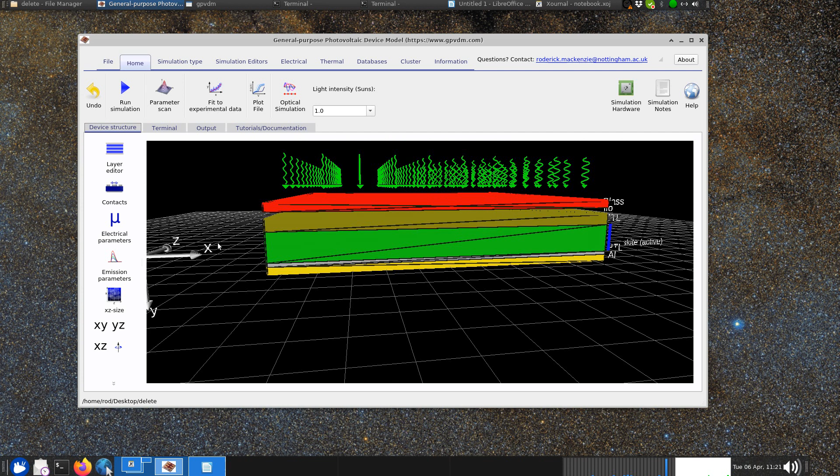So here's the simulation the person sent in. So here's the device structure. Firstly, let's just have a look at the structure. You've got some glass, some ITO, and you've got one active layer there. And let's just run a little simulation, see what results it produces. So there we go. Let's look at the JV curve. Let's just zoom in and see what we're getting here.

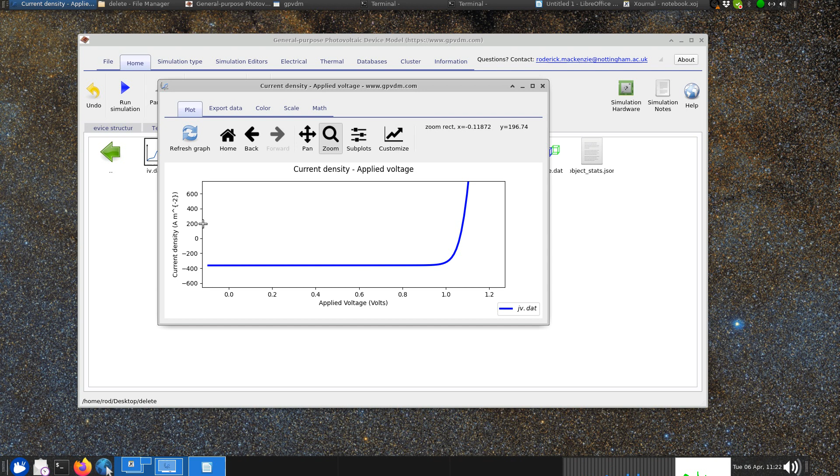So quite a lot of short circuit current, about 400 amps per meter squared. Very high JSC. So this is why you're getting very high efficiencies, because you've got a load of current being produced and you've got a very, very high VOC, which will make the efficiency very high. So let's just look at those numbers in detail.

So let's look at SimInfo, and we've got fill factor of 0.87, power conversion efficiency of 33%, which is crazy high. VOC very high, JSC very, very high. So the question is, why is this happening? Well, let's look at a bit of theory to try and understand why this is happening.

So let's just draw a solar cell. Here's one contact, and here's another contact. And let's draw some light coming in. We'll call these photons. And these will generate an electron and a hole pair. Now, this electron will move to the contacts, and this hole will move to the contacts. And they'll move to the contacts at a speed dictated by the mobility, which is mu. So mu for the electrons and mu for the holes. And this is called the charge carrier mobility.

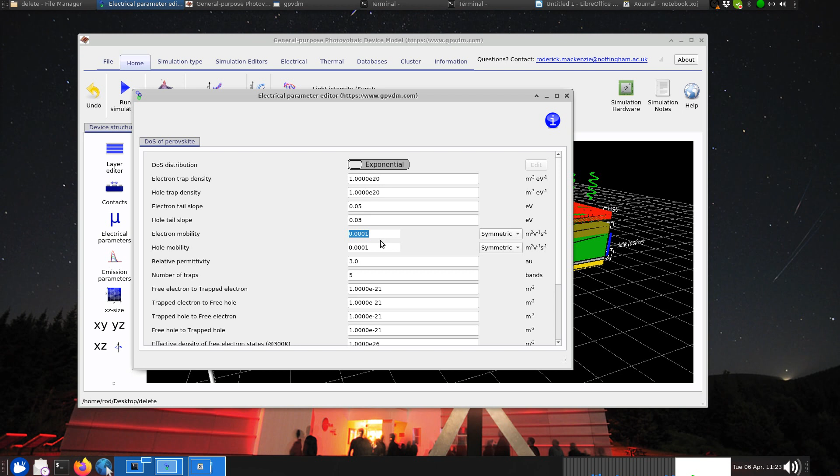And if you look at the model where this is, it's here in the electrical parameter tab. So it's got electron mobility, and it's whatever this has been set to here. So you can imagine that if the mobility is very, very high, then the rate at which the electrons and holes are going to move to contacts is going to be very quick. If the mobility is very small, the rate at which the carriers move to contacts is going to be slow.

Now, on their way to the contacts, this electron could meet another hole. So the electron moves along here, and all of a sudden it's met another hole. And what we can get here is a recombination event, when the electron recombines with a hole. Now, if the probability of this event is basically 0, so if the recombination doesn't happen, then 100%. So if we have 100 photons coming in here, we'll get 100 electrons out of there, and the same we'll get 100 holes out of here.

If the recombination probability is, say, 50%, then 50% of the photons that are generated will effectively be able to reach the contact. So you only get 50% coming out of here. So effectively you've got this recombination event eating charges that are generated. I'll draw it as a crocodile. There's a crocodile eating the charge carriers on the way out of the device. Okay, I'll get rid of that.

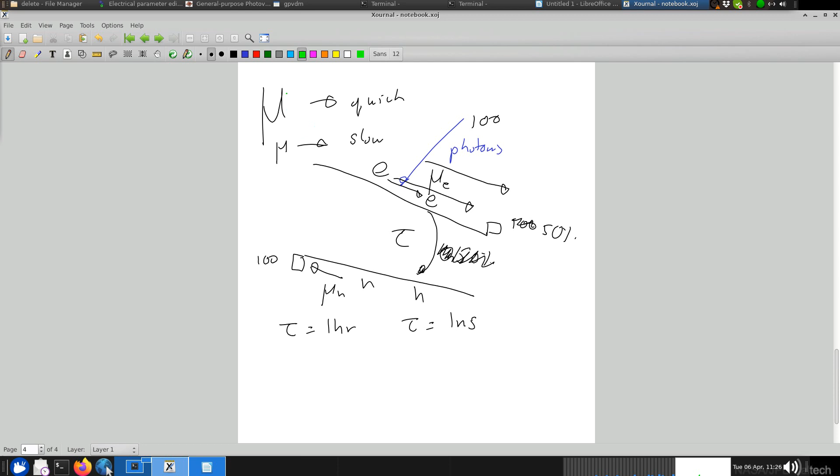So basically, if we do this in green, a big mobility is good because it makes our charge carriers get to contacts quickly, so quickly like that, and holes like that. A low mobility is bad because the charge carriers will hang around in the device for a long time. A long tau or a big tau is good because it means that recombination happens really slowly. A small tau is bad because it means recombination happens really quickly and the chance of your charge carrier getting to the edge of the device is very, very slow.

So what we can do is we can write something called the mu tau product. So this is mu, right? And we can write tau there. Now, if we think about it, a big mu is good. So a big mu means carriers get quickly out of the device, and a big tau is good because it means there's not much recombination. So therefore, if our mu tau product is big, this is good. There's a smiley face.

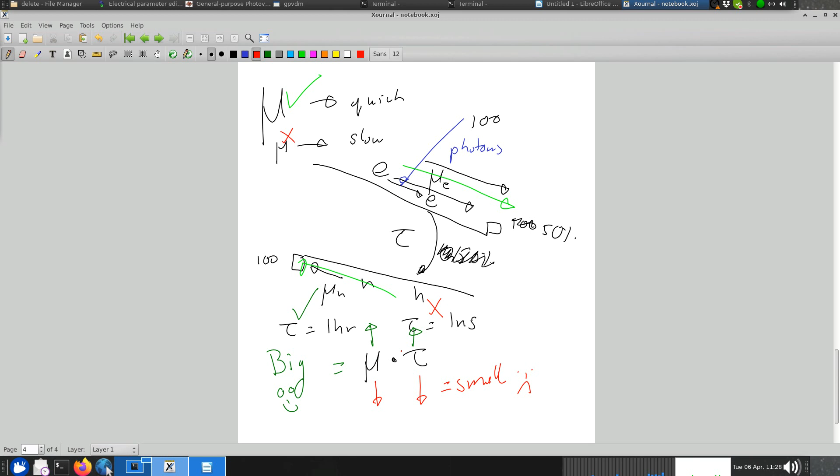Now, on the other side, if our mu tau product is small, so, I'll draw this in red, if our mu is small and our tau is fast, our mu tau product is small, and this is bad, because effectively we have high recombination and low mobility. So the whole game is about getting these photo-generated carriers out of the device as quickly as possible without recombining.

So if you have a very high efficiency device, your mu tau product will be big. If you have a very inefficient device, your mu tau product will be small. So what does this mean for our person who sent in the question? If we get the question back up, basically, why is the conversion efficiency so high? Well, we can answer this now. The answer is either our mu is very big or our tau is very big, okay?

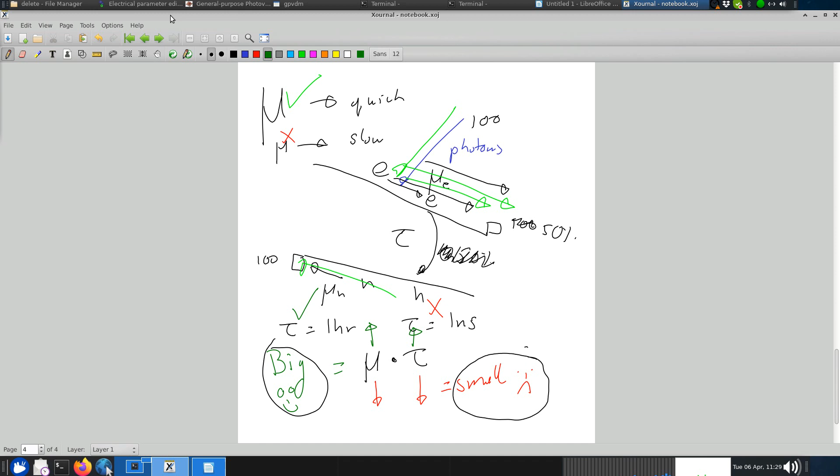So if we move to the next page, let's try and understand why this is. Let's firstly try and reduce the efficiency of the model. So let's look at what parameters this person's got. We've got a mobility here which doesn't seem massively high. Let's look at the recombination. There's two different types of recombination in this model. I'll go to the next page here.

If this is our device again, we've got free-to-free carrier recombination. So you've got an electron here and a hole here, and the electron can basically recombine like that. That's one type of recombination. Another recombination is where the electrons effectively get trapped into trap states in the band, and then a hole goes and annihilates them from the trap states. And the other mechanism can happen where a hole gets trapped into a trap state, and an electron comes and annihilates these holes from the trap states. And this is called Shockley-Read-Hall recombination, and you can go and read about that on Wikipedia or wherever.

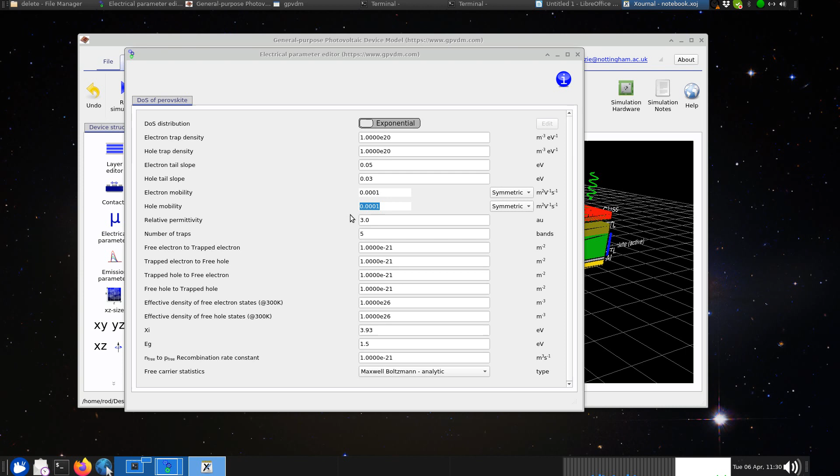Now, if we look at these numbers that this person's put in here, they've got a mixture of free-to-free recombination, so that's this mechanism here, this line here, and they've also got some of this trap recombination. This number here is very small. 1e20 is exceptionally small.

So what I would probably do if this was me is I'd probably just turn off the free-to-free recombination, because generally, if it's a disordered device, you're probably going to have free-to-trap dominating, depending on the material system. And I'll probably boost the number of the trap carriers up to say 1e23. So this is the number of trapped states. So effectively, let's put this back here. You can probably look at this in some of my other videos.

I've talked about this, but effectively, these traps that the electrons and holes get trapped into are described by an exponential. So this is the LUMO. Effectively, you've got an exponential distribution of trap states here. So the number of traps at any depth will be a function of the n, which is the density of traps here, times an exponential of a depth all over a tail slope, which is called the Urbach energy. And this will be equal to the n at a depth. So this will describe effectively this distribution of trap states.

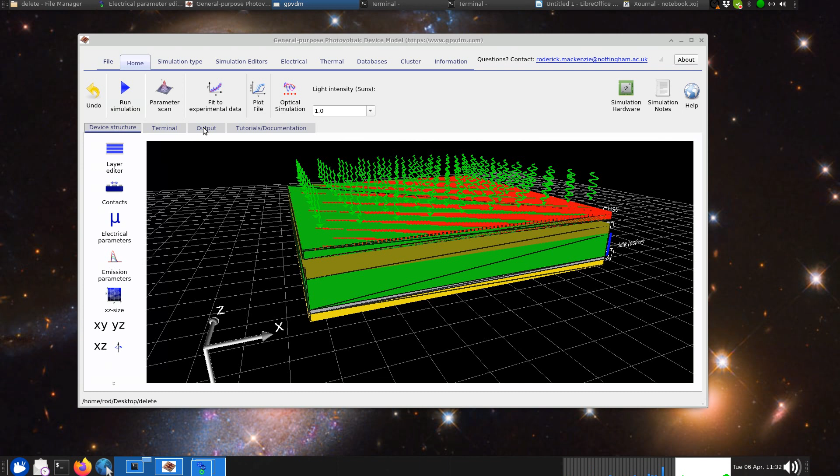Let's look at the JV curve. So let's just have a little bit of zoom in on what's happening here. Still got quite a high JSC. VOC is still pretty high. We'll have another little bit of a look in a minute. Let's look at the efficiency of the device here. It's not gone down much, so let's have another little play about with what's going on here.

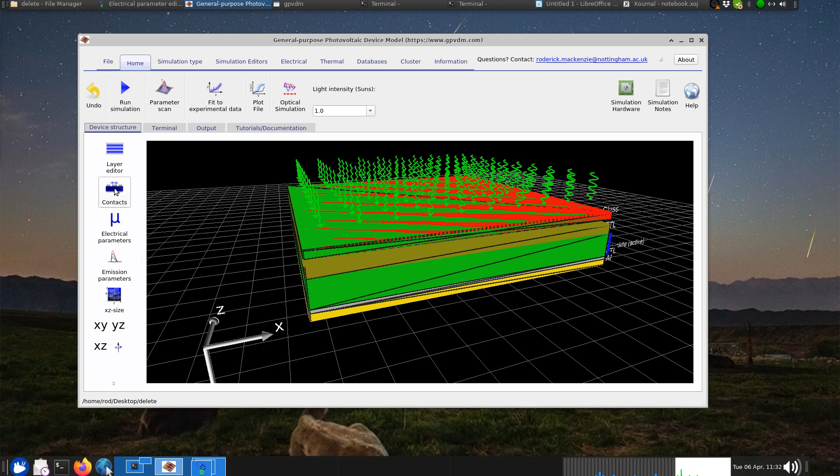Let's look at the contacts. Maybe there's something wrong with the contacts. Yeah, so this is one reason why it's going wrong for this person. He or she has got the... this is actually a common mistake that people make in simulations. This is the effective density of states, right? So this is the Maxwell-Boltzmann description.

So if you go and look up Maxwell-Boltzmann statistics, you'll have something like the density of electrons is equal to the effective density of states times exponential. I always get this the wrong way around, you have to forgive me. In fact, I'll just draw this as delta E over kT. And what this effectively means is, if this is the LUMO and this is the Fermi energy, this delta E is the distance between the LUMO and the Fermi energy.

And if this delta E is 0, then exponential of 0 is 1, so basically n equals Ne. Now, this Fermi level must sit below the LUMO. For a solar cell, this must be the case. So whatever happens, your Fermi level, E_F, must sit below the LUMO. You can't have this going above the LUMO. It can happen sometimes, but not in solar cells, in things like lasers.

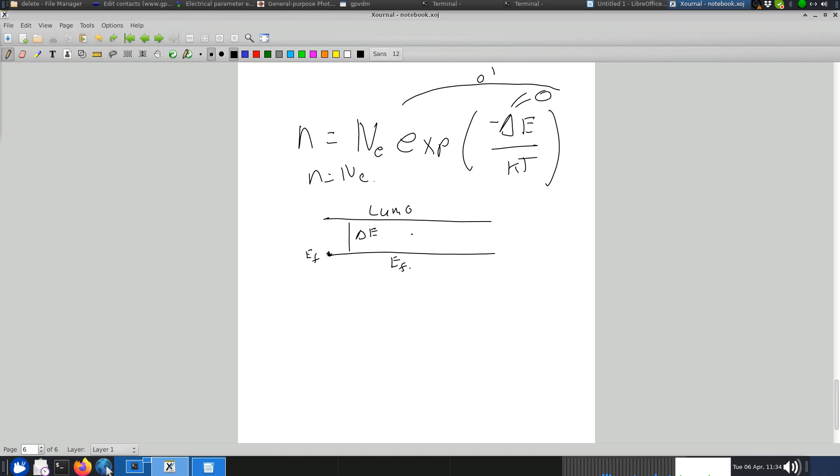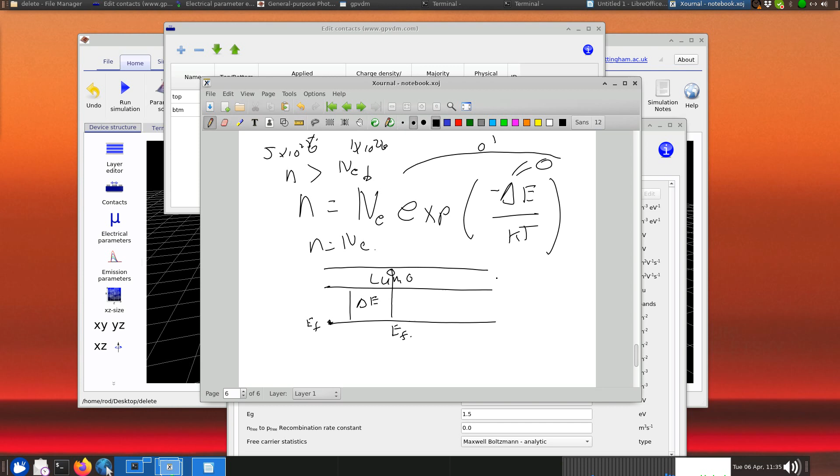So what this person's done is, if you look here, we've got the effective density of states is 1e26, and this person's put the charge density on the contacts as 5e26. So the charge density n is bigger than the effective density of states, which means he's pushed this Fermi level above the LUMO, which is completely unphysical for this device. That probably explains why he's getting quite crazy results.

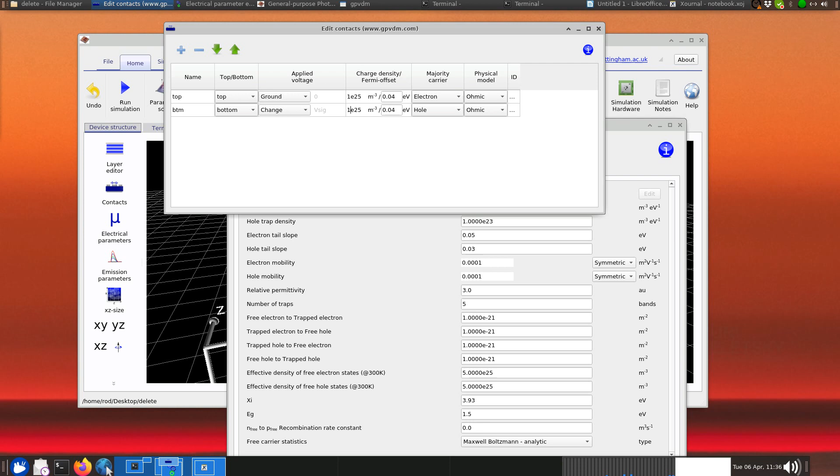So I'd set this to about 5e25, then I'd set this as 1e25. You could probably have this as 5e25, but it's probably realistic not to have perfect contacts. So now we've brought the Fermi level of the contact from being above the LUMO down to being below the LUMO. This is sensible. So let's give that another go, which might explain what's going on.

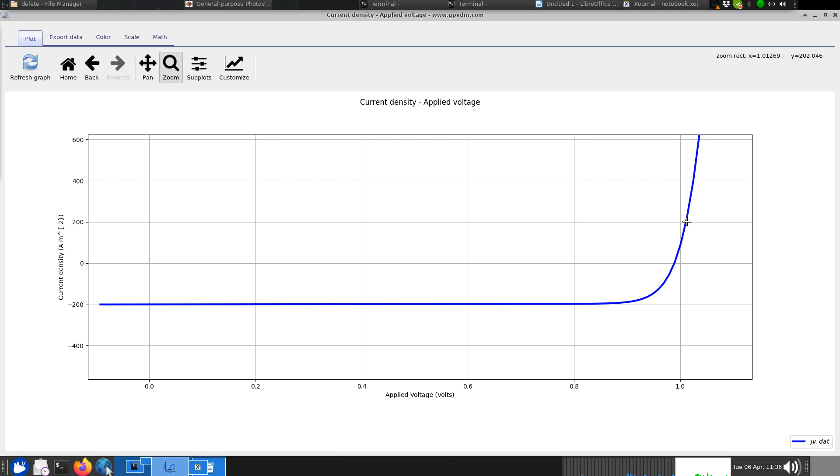So what have we got now? Well, JSC dropped tremendously, by about half. Let's put the grid on by pressing G. And we've got a VOC just over a volt. So that's got to have reduced the efficiency of the cell now. So power conversion efficiency 17%.

So I gave a chat about effectively the mu-tau product, which I think was interesting, and that could have been part of the problem. But the actual problem with the simulation was the charge density on the contacts being too high. Let's finally pop this back to what the person had before and see.

So we're going to change density of states back to 1e26, and I think this was 1e-21. Let's see what the efficiency looks like with that, putting it back to how the person sent it to me originally. Let's look at the SimInfo. Yeah, so actually the recombination they had in there was probably right, and the actual problem with the simulation was the contacts had too high a charge density.

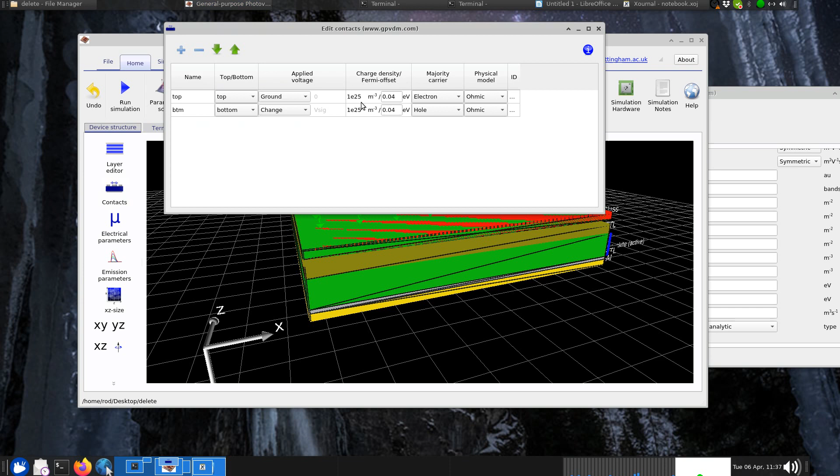So that's it. I set off thinking the problem with the simulation was mu-tau products, had an interesting chat on the mu-tau product, and found out it was actually something different.